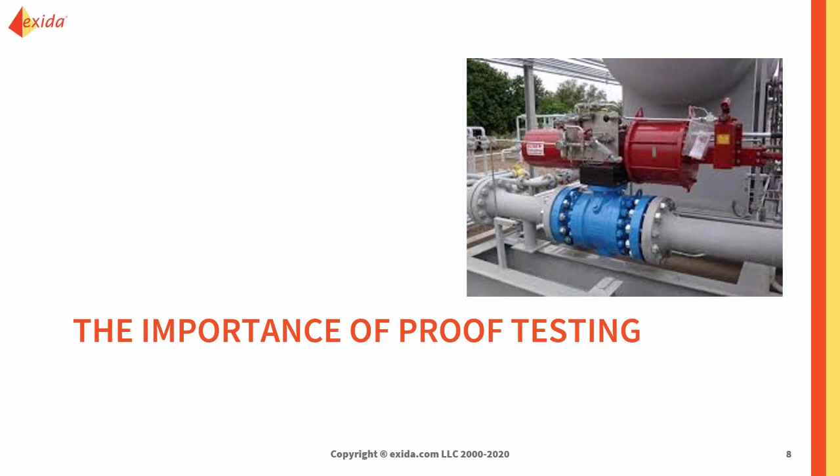Okay, with that brief introduction completed, let's get to the meat of what today is all about. And that, of course, is the importance of proof testing. So why is it important? Well, we're going to step through some of the reasons why as we go into the webinar.

And really what we're talking about now is that from the IEC 61511 point of view, the safety life cycle, as it's known, there's three phases. There's the analysis phase, there's the design and implementation phase, and there's the operation and maintenance phase. And some of you that have been on the FSE 100 course that I've taught will remember what I say about the old 20-20-20 rule. Typically 20 weeks in design, 20 months in implementation, and 20 years in operation.

So the safety instrumented system with its individual safety instrumented functions is designed around a life cycle approach. This means that it's not just a once and done. In other words, we go through and do our risk assessments, we understand what hazards we have to protect against, we put in the mitigation through our safety instrumented system and our SIFs designed to meet certain requirements in terms of risk reduction to mitigate our risk, and then we're off and running. So that's just the first part.

And when we think about 20-20-20, we're going to be spending more than 95% of the time of the SIS over the SIF's lifetime in the operation and maintenance phase. So what we have to make sure is that we continue to maintain the amount of risk reduction that we need. So that requires maintenance, of course, and it requires us to undertake the correct amount of mechanical integrity and making sure that components within the SIFs, safety instrumented functions, are replaced and refurbished when they need to be.

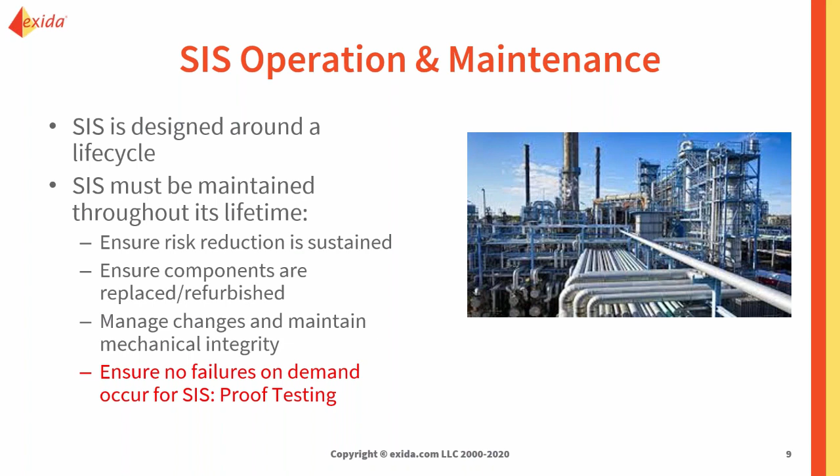So just to refresh ourselves about the objectives of the safety life cycle, the whole point is to help us build safer systems, that we not have the same problems from the past, and we should also be matching our risk to our design. So it's a balancing act. We have to make sure that we have an optimum design to meet the required risk reduction that we need. And the other thing is to help us eliminate weak link designs that actually cost a lot and don't really give us anything.

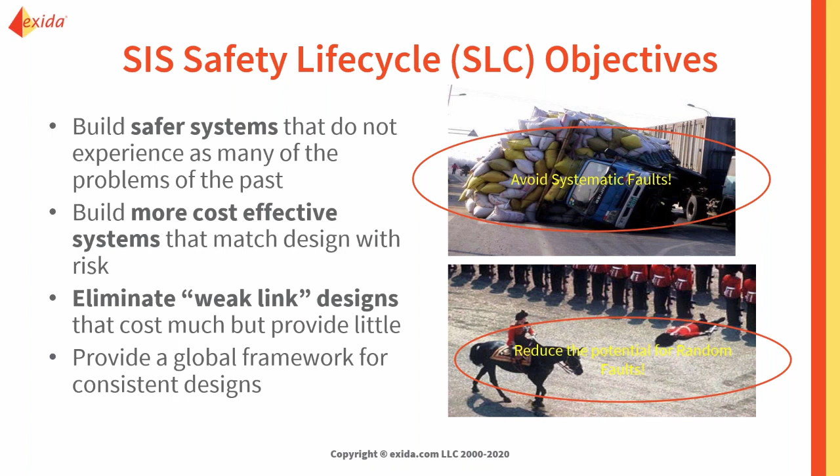But more importantly, it gives us a global framework. And the basic principle is that we want to manage the occurrence of systematic faults and reduce the potential for random faults. So these are the two things that we are looking to manage.

If we look at the life cycle, as I mentioned to you, there's the analysis phase where we need to be making sure we've identified the potential hazards and the consequences associated with those hazards, which leads us into providing the mitigation we need to prevent those hazards from causing unwanted consequences within our tolerable risk. We then design for that. We test, we install and commission, and then we validate, and then we start running.

And you can see there's this one box here, which is clause 16, which governs operation and maintenance. And this is where we're going to be spending the majority of the lifetime of our SIS, in this operation and maintenance side.

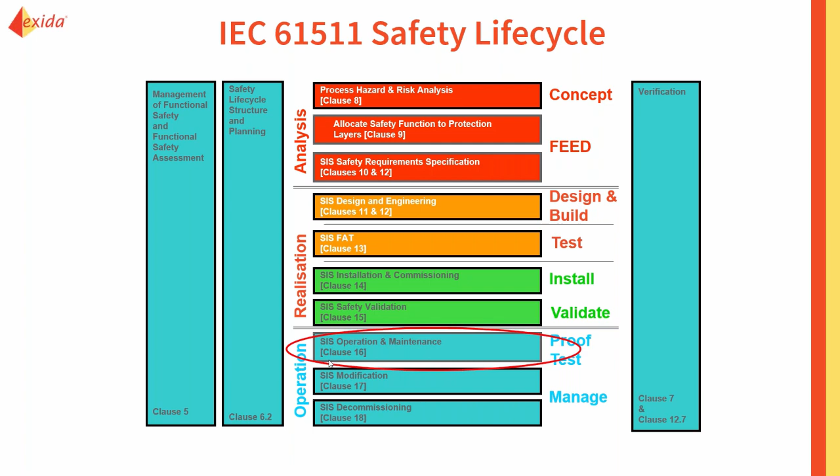So let's just talk about some fundamentals when it comes to safety instrumented systems and safety instrumented functions. We use probabilistic calculations to predict the likelihood of a failure on demand. We've all heard of the probability of failure on demand, and of course, with low demand mode SIFs, we talk about the average probability of failure on demand, the PFD average. And the purpose of this is to give us an indication of the likelihood of getting a failure that could cause us to fail on demand.

And these probabilistic calculations are based upon a simple concept of constant failure rate during useful life. Now, there are other webinars I've done on this where I talked about the importance of understanding what useful life is. And we're going to touch on it here.

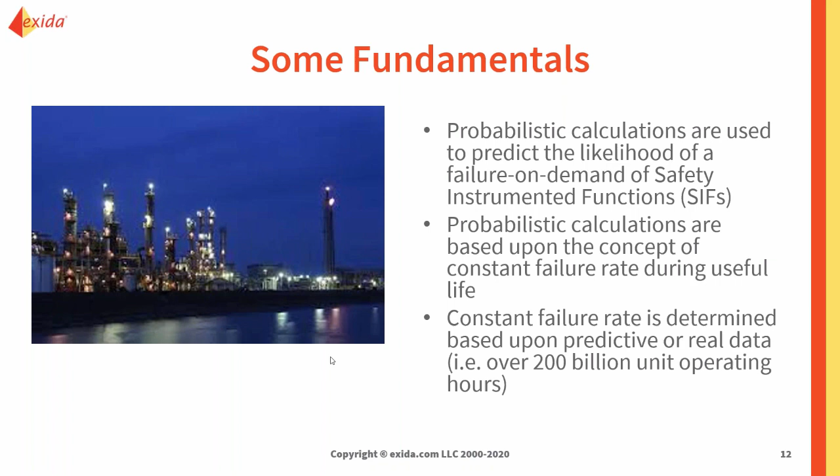So constant failure rate is determined based upon predictive or real data that's been gathered. Now, in the last 40 or 50 years, we have more than 200 billion unit operating hours of data that's been gathered. There have been various organizations gathering this data. And so we have pretty good, reliable data that we can use.

So when it comes to looking at the flow of the information, the manufacturers themselves will put in information regarding failure rates, the types of failures. Are they safe? Are they dangerous? They list all of that. They also list specific instructions for installation, and anything that you need to do to meet a specific SIL requirement.

When I teach the class, I euphemistically refer to it as RTFM, which is read the flaming manual. And it's surprising how many times when I talk to end users and ask them, okay, do you have safety manuals? They do not. Even some of the engineering companies who are engineering the safety instrumented systems don't always have the safety manuals from the manufacturers. But that's an essential part of this, because we have to make sure that we configure the device right. If we're relying on diagnostics, is the device configured to run the diagnostics? And so on and so forth.

Then we have to do a validation of our SIS, which is to make sure that the as designed, installed, commissioned SIS and its SIFs meet all the requirements. We also should be doing a cybersecurity audit now, because the standard was changed in 2016 to introduce cybersecurity requirements for SIS and BPCS. So we should make sure that we've done a proper cybersecurity risk assessment and we've implemented the relevant safeguards to prevent the potential for a cyber incident.

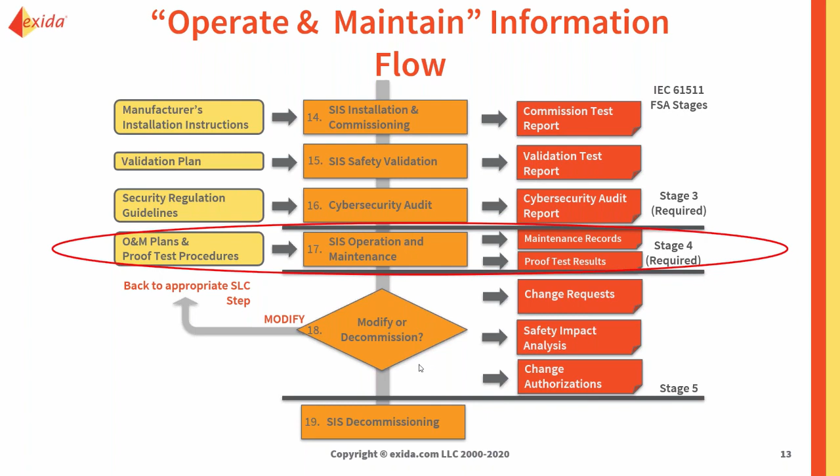And then, of course, if we have to make any modifications or if we decommission, we're taking the SIS offline, then we have to look at that and we have to manage that. And that's part of the stage 5. So this is where we're focusing right now, operation and maintenance. So again, just to go back a little bit on what we said, probabilistic calculations are based upon a concept of constant failure during useful life.

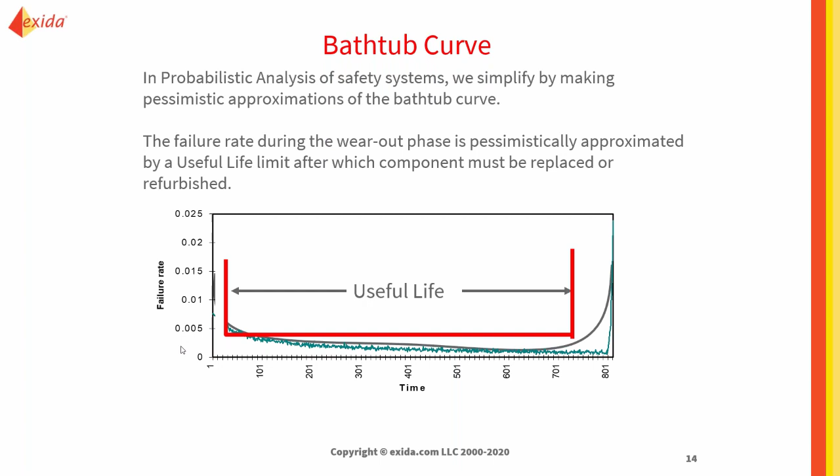Once we get outside of here, it's no longer predictable. So in theory, you have no probability of failure because you can assume it's going to fail, and that's that. And that's why if you have a run to fail strategy, then as soon as you get outside of useful life, you no longer have any safety instrumented functions.

So that means if we're taking this constant failure rate during useful life, we can say that our failure rate, indicated by lambda, is inversely related to the mean time, the average time to fail. So 1 over lambda will give us the average time to fail.

So for example, if we have a pressure transmitter that has a total failure rate of 5 times 10 to the minus 7 failures per hour, or what we call 500 FITs. A FIT is basically 10 to the minus 9 failures per hour. So 500 FITs, 500 times 10 to the minus 9. If we invert that, we then get an MTTF of 2 million hours, which if we divide by 8,760, the number of hours in a year, tells us 228 years.

Now, here again, this is not telling us that a transmitter is going to last 228 years. It's saying that this is a mean time to fail. So in other words, if we had a plant that had 228 of these devices, we could probably expect at least one failure per year. That's what that's saying. It's not the same as useful life, because the useful life of a transmitter may be, for example, 20 years. So this is the important thing to remember.

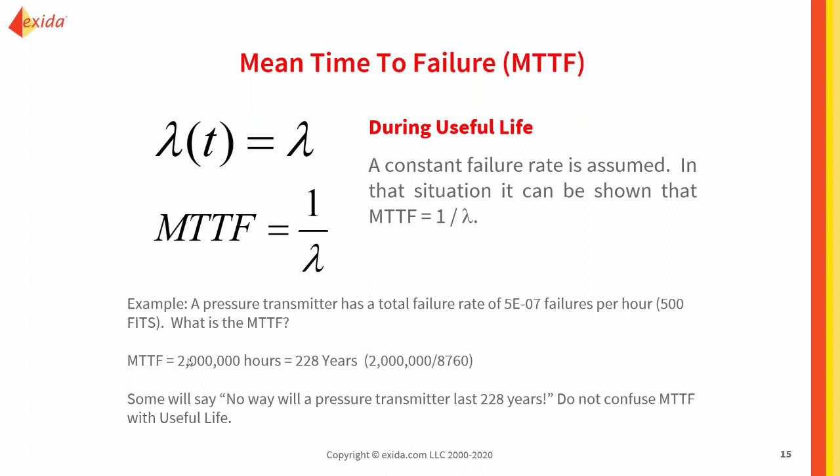And of course, when we come to look at the probability of failure on demand, there are different types of failures that we can have. We can have failure modes, as they're called. So probability of failing on demand is a dangerous failure. So this is number one that we worry about. However, you can also have safe failures. In other words, a device fails, it could cause a trip, but that's a safe failure.

Now, the trip, of course, is not something we want, because that means we now have to start back up again, and there's delays and there's costs. Plus, it's very risky when you start up, because most accidents will happen either during startup or during maintenance. So fail safe. And when we look at the reliability and the predictability of our SIFs and our SIS, we also want to look at what's our mean time to fail safe. What we call lambda S is the spurious trip rate, the safe failures.

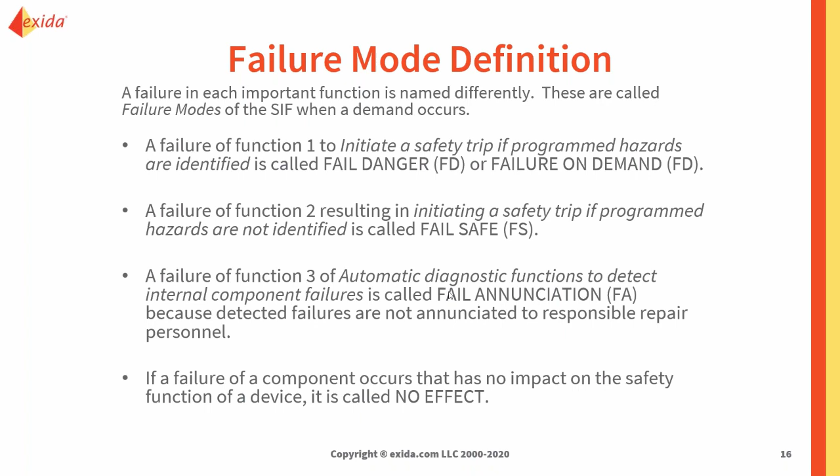Then we might have diagnostics, and of course, if the diagnostics fail, then we need to know that the diagnostics failed, and this is called fail annunciation. And you can also have no effect faults, which is a failure that occurs that has nothing to do with safety. And I shall give you an example of that.

So let's look at a typical transmitter, how a transmitter can fail. So depending upon how the transmitter is being used, if we are looking for detecting a high, the tripping, if our output ends up failing and saturating high, that's going to indicate a trip, and that's known as a safe failure. However, if we're looking for a low and we're now saturated high, that is a dangerous failure, because we won't be able to see the low. And the same with the drift.

Usually if an output's frozen, we assume that's dangerous. We don't know where the actual reading is. If the diagnostic fails, that's annunciated. And in this case, there's an LCD. If the LCD fails, then this is a no effect failure. Okay.

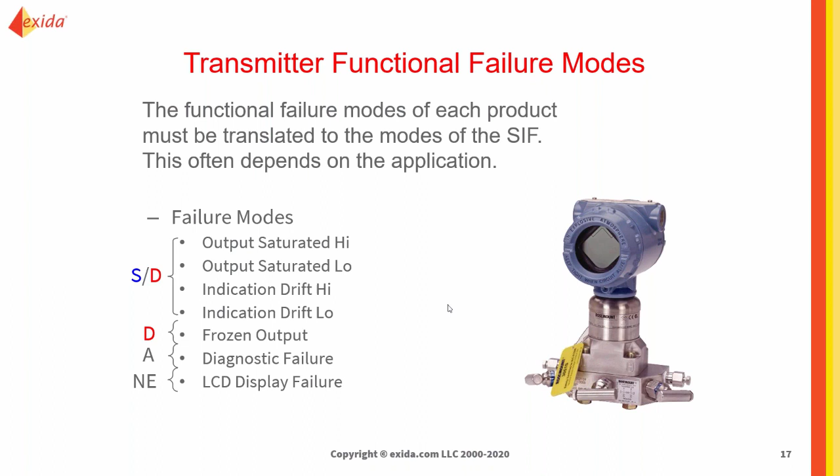When it comes to final elements, now this is a different story. And if we're looking at de-energized to trip applications, one of the biggest things that we worry about in low demand applications with de-energized to trip is, when we trip, will the valve close?

And the biggest issue that we have there is what's known as stiction. So for example, if our solenoid plunger is stuck, that is obviously a dangerous failure, because we cannot close. If the coil burns out, then the valve should close. That's a fail safe. If the actuator shaft fails, this is unpredictable, so we always assume worst case, so it's fail danger. If a seal fails, that's a fail safe.

If the spring fails, that's a fail danger, because now we can't close the valve. If we've got pneumatics, if the air fails, that's a fail safe. If the actuator binds, in other words, it's not able to move properly, that's a fail danger, because we assume worst case. And if the valve shaft fails, again, we assume worst case, that's fail danger.

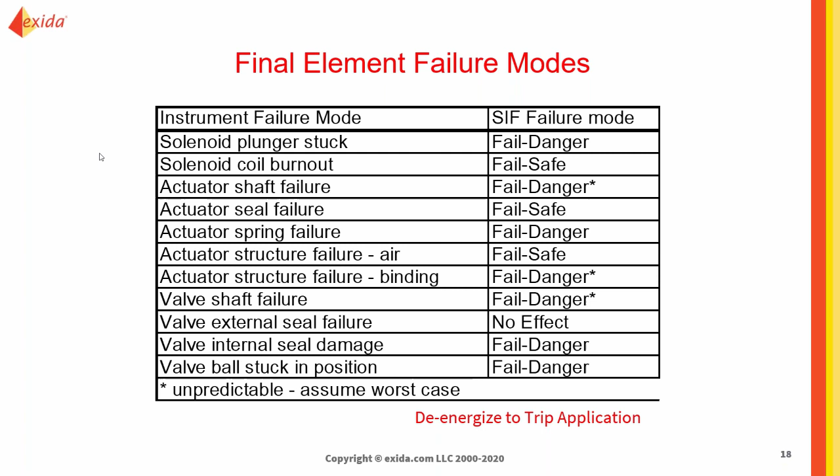If the external seal fails, that's a no effect. If the valve internal seal is damaged, that's a fail danger, because the valve won't be able to properly close. And the valve ball stuck in position is a fail danger as well. So you can see that with final elements, there are a lot more potential dangerous modes of failure. And usually, when it comes to safety instrumented systems and safety instrumented functions, it's always the final element that is the major contributor to the PFD average.

So just coming back to random and systematic again. Random failures, according to 61508 definitions, is a failure occurring at a random time which results from one or more possible degradation mechanisms in the hardware. Now, one of the misconceptions that a lot of people have is that random failures are all hardware related, systematic failures are human. But that's not necessarily the case, because humans can make random errors. In other words, somebody could be well trained, they could be following their procedure, and the procedure is correct, but they're not concentrating, they're having a bad day, haven't had enough coffee, and they miscalibrate the device. That is not necessarily a systematic failure.

And so the other thing to remember is when we're looking at probability of failure on demand, we always consider random failures. That's why it's always important when you're recording failures in the field to be careful about how you categorize them. And the rule that I usually explain to the class is to use the approach of saying everything's random until proven otherwise. That way you record the failure, won't throw it away. You can always go back and look and see if there's a potential systematic.

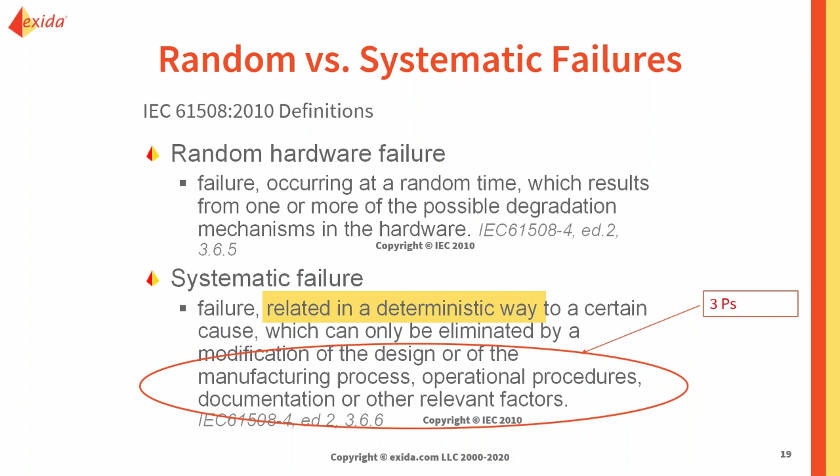And systematic is defined as a failure related in a deterministic way to a certain cause which can only be eliminated by a modification of the design or of the manufacturing process, operational procedures, documentation or other relevant factors. And in this case, I always refer to this as the 3 Ps. P number 1 is personnel. Are they properly trained and competent to do what they're doing? P number 2 is all about procedures. Do we have well-written procedures that are being followed? A lot of accidents have happened where procedures have not been followed. And thirdly, paper. Do we have a paper trail to show that we're doing what we said we would do? So this is what I refer to as the 3 Ps, and that's a good way to remember it.

So random failures are due to a non-deterministic system component loss of functionality, which is typically hardware related, although humans can make random errors. And systematic is a cause: a bad requirement specification, design fault, wrong component, error in the software program, etc. And this is where the 3 Ps come in.

So what is proof testing about? Well, 61511 under clause 16, and clause 16 governs all the O&M side of things, requires us to have a proof test procedure developed for every piece of equipment in a safety instrumented function. And this proof test procedure should describe the correct operation and correct diagnostic alarms and indications. And we need to do this regularly.

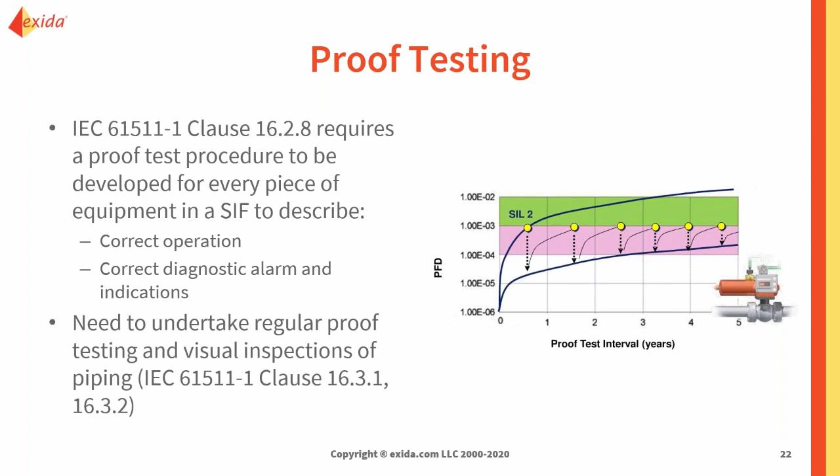The other thing that a proof test also needs to include is a visual inspection. So when you come to do a proof test, you should always do an as-found review, which is look to see, are there any signs of corrosion? Do we have any loose terminals? Has anybody made some unauthorized modifications?

And if we make a repair, we should also now complete a proof test. The standard now also requires that if there's an application program change, then you need to go back and test again all the SIFs impacted by this change. So it's not just a question of testing the application program. You need to go and rerun all the proof tests for the SIFs that are affected.

And the only exceptions to this is if there's been an appropriate review and partial testing of changes that have been carried out. If you defer proof tests, you've got to have suitable management procedures in place. And now the standard also requires you to define a maximum repair time. So if you're doing it online, if you're putting a SIF in bypass to test it and then to either restore it or repair it, you have to specify your maximum time to do that. So you can't just leave the SIF in bypass.

And there was a case where a plant manager did an audit and was horrified to find that one of the SIFs had been left in bypass for 18 months. Nobody realized it. Proof test intervals have to be specified in the SRS. That's a requirement. So the safety requirement specification will say, for example, that the proof test interval is 18 months.

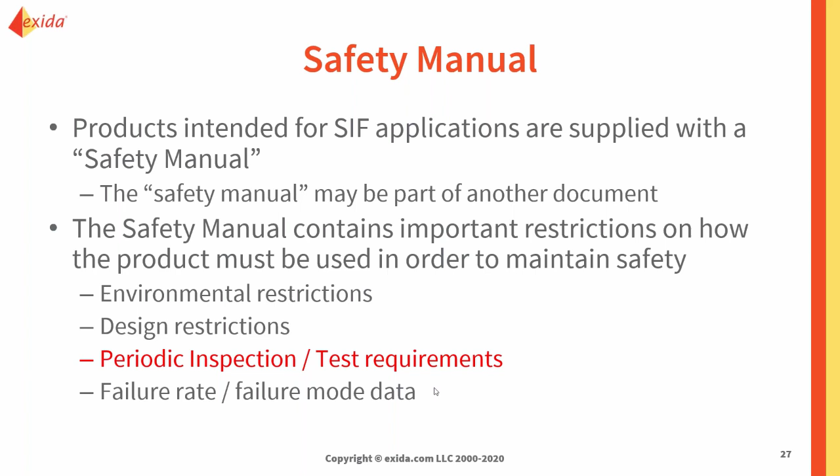So the safety manual, again, is something that you need to have because it contains important restrictions on how the product has got to be used to maintain safety. So there'll be environmental restrictions, design restrictions, and of course our periodic inspection and test requirements, as well as the failure rate data.

So when we look at a simplified approach to PFD average, PFD average is approximately lambda D, which is the dangerous failure rate, because that's what we're interested in, multiplied by our proof test interval divided by 2. And this is simple because it's assuming perfect proof testing, which means we can find and fix all the dangerous faults, which in reality we cannot.

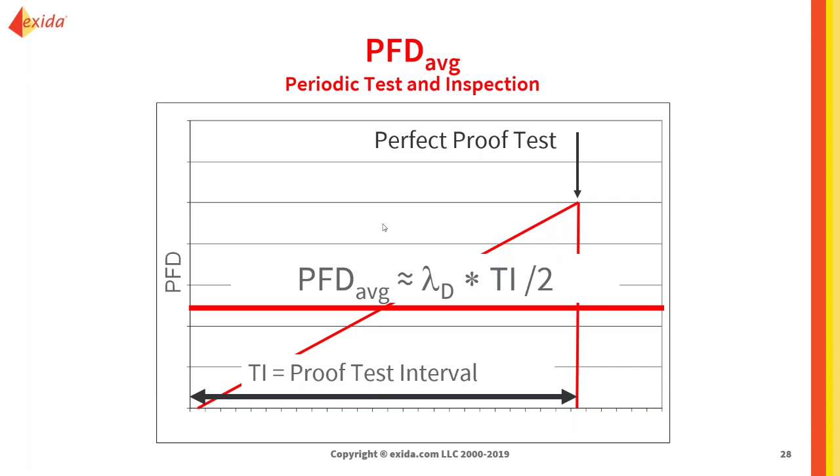There's no such thing as 100% proof test coverage. Some of the logic solver manufacturers can claim 99% or better because of the diagnostics, but when it comes to final elements, that's never going to happen. So if you are using 100% now, then think again, because you're just fooling yourself.

So for example, let's look at a butterfly valve and a pneumatic single action actuator, which we will use to implement a close on trip function. So if we did a full stroke test of the actuator valve assembly, does that find all the potential dangerous faults? Or are there any left? Well, of course, we won't find all the dangerous faults.

A full stroke test is fine, it means you can move the valve all the way across, but you don't know if you've got damaged seals, you don't know if you've got a damaged butterfly, and you could have a damaged shaft. So even though you've done a full stroke, it still might not fully close.

So now we have to include this concept of imperfect proof testing in our simplified formula for PFD average in a 1-out-of-1 configuration, in other words, single device, so we have single sensor, logic solver, final element. We talk about CPT, which is the effective coverage of proof tests. So this is 0 to 100%. If it's perfect, it's 100% or 1.

And then because of imperfect proof testing, we now have to consider the operational lifetime of the SIF, which is known as mission time. Because if you look at the formula now, if it's 100%, then this has no bearing, because this goes to 0. If it's not 100%, every time we do a proof test, there's always going to be a percentage of dangerous faults we can't find.

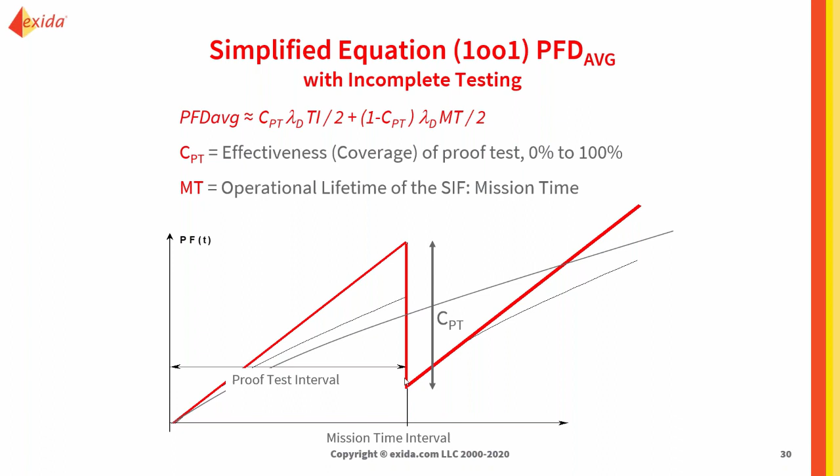So instead of coming back all the way down to 0 with our probability of failure, there's some element left. And so every time we do a proof test now, it's not going to come back to the same point. Let's say if we are 80% effective with our proof test, then every time we do a proof test, we are only going to get 80%. So there's 20% each time that we can't, and this accumulates over the mission time.

And what happens is our PFD gradually rises. And it can get to the point where the PFD average has moved from one SIL down to the next. So this is why we have to make sure that we do our proof testing effectively, and we are watching the useful life.

So the correlation between proof test interval and mission time and proof test coverage is very important. So if, for example, you set your mission time at 30 years and you want a 4-year proof test interval and you're trying to get to SIL 2, think again. You will not be able to do that.

You can do partial valve stroking, which will help, but typically you have to understand this correlation between mission time, proof test interval, and the required SIL. So this is very important to understand, and this is why it's so important to make sure that we are doing our proof tests in a timely fashion. We're not going outside of the 10% margin, and we're following the proof test procedures to ensure that we're able to get the best coverage we can get, remembering that there's no such thing as 100% proof test coverage.

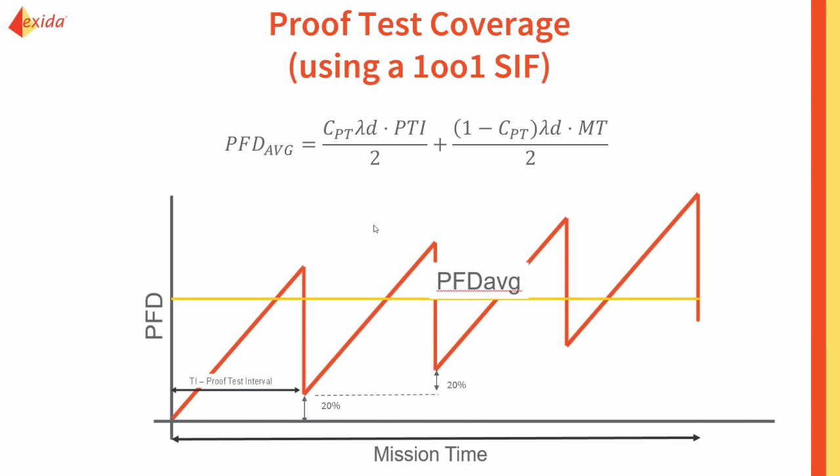Okay, so in summary, the integrity of our SIF is maintained as a result of doing regular proof testing. We still have to be mindful of the useful life, remember, because proof testing helps us maintain it. But once we get outside of useful life, we no longer have a probability of failure on demand, because we cannot rely on it being a constant failure rate. So we effectively have no PFD calculation.

The proof testing has to be as effective as it can be, and if we are doing it properly, then we can maintain the integrity of our low demand SIFs. There is no such thing as a perfect proof test, and that's why it's important to understand what the manufacturer is recommending when it comes to proof test and proof test frequency to maintain the integrity during the useful life of the product. And if end users don't have the safety manuals, then you have to make sure that you are following the correct refurbishment and replacement of the devices when they come to the end of their useful life.

And this is difficult because I know if the device hasn't failed and you go back to your managers and say, well, we need to replace these devices, and he says, well, have they failed? And you say no, then he says, why? There needs to be an explanation as to why. And this comes down to culture again. And one of the problems I've seen quite often is that managers don't fully understand the reasons why we do some of the things that we do from a functional safety point of view.